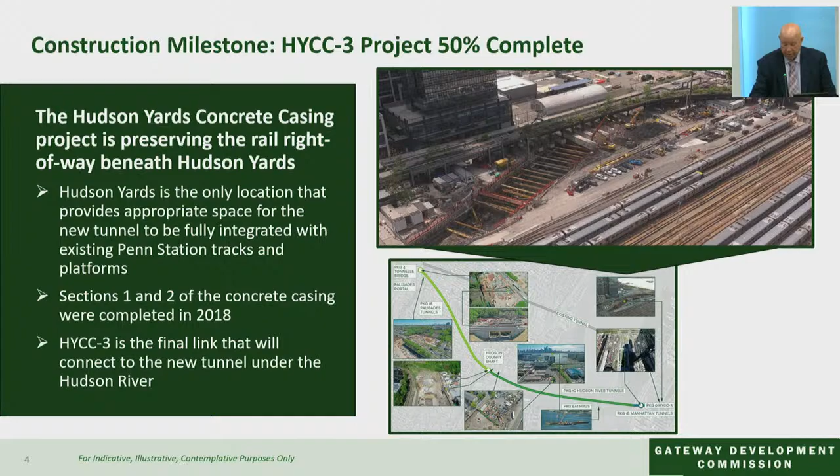The Hudson Yards concrete casing is a complex and challenging project. The biggest challenge is that complicated operations must take place within a confined staging area. The construction site is tightly bordered by an active train storage yard and maintenance facility to the north, the High Line to the south, and two busy Manhattan thoroughfares to the west and east of the parcel.

To account for these factors, the team is using the cut-and-cover tunneling method, which involves digging a trench, building the tunnel, and refilling the hole over the new tunnel segment. To prepare for excavation, the team had to drive more than 300 secant piles in the area where the trench is being excavated. Excavation and dewatering is now in progress, and the team has removed more than 40,000 tons of soil and more than 3 million gallons of water.

As they go down, they will install struts to basically construct the walls of the tunnel section. Hundreds of workers are employed building Hudson Yards Concrete Casing 3 project, and right now the project will support more than 4,800 jobs in total.

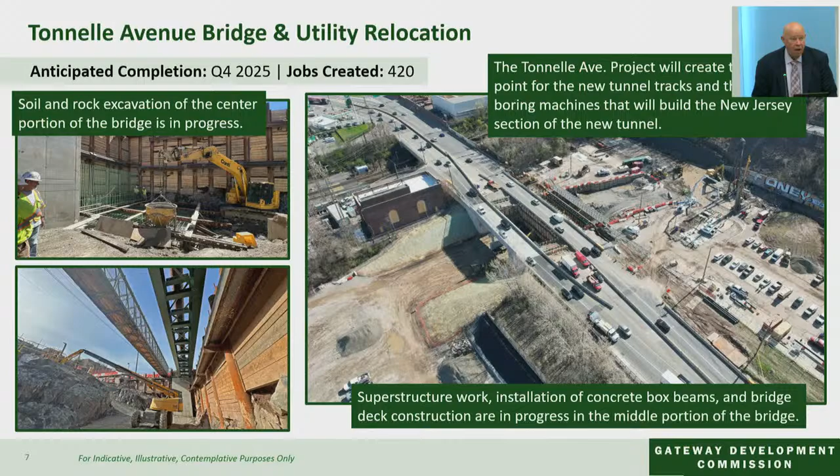We continue to make meaningful progress on our other active construction projects.

We broke ground on Hudson Yards Concrete Casing Section 3 in November of 2023, and the first phase of construction involved building large concrete blocks to support the High Line while construction takes place. At the end of 2024, excavation and dewatering of the trench with the tunnel wall began. The trench is now 50 feet deep at its deepest point. We expect the pouring of the tunnel box concrete this fall.

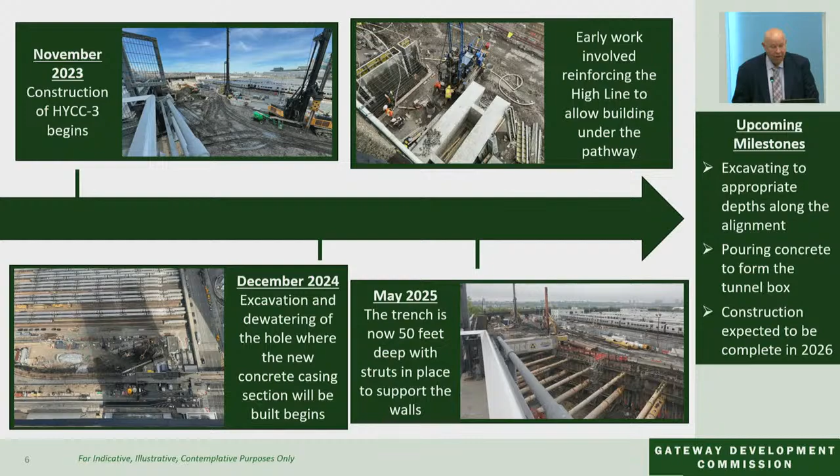We continue to make meaningful progress on our other active construction projects.

The Tonnelle Avenue project is now more than three-quarters complete and remains on track to be completed by the end of this year. The western portion of the bridge has been completed and reopened for traffic. Temporary pedestrian and utility bridges have also been installed alongside the roadway. Superstructure work, installation of concrete box beams, and bridge deck construction are in progress in the middle portion. This portion of the bridge is expected to open for traffic in the coming months.

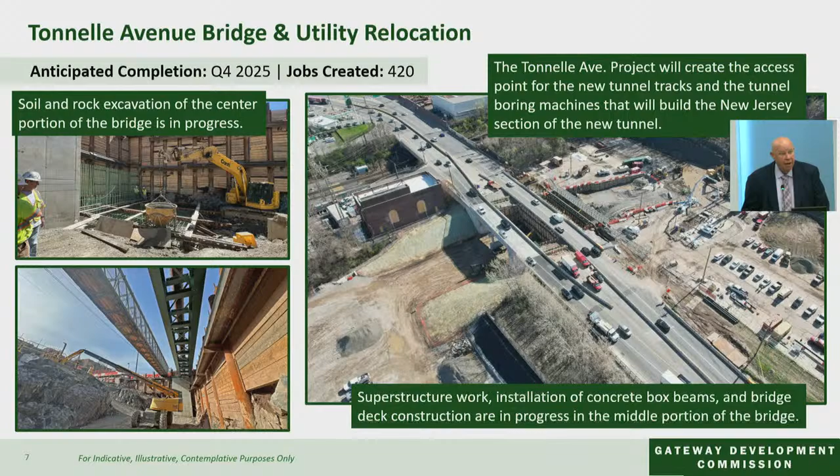The Hudson River Ground Stabilization Project is mixing concrete into the soil beneath the Hudson River in preparation for the tunnel boring that will go through that section. To shield the work area from the strong current, the team has built a temporary cofferdam in the river. You can see that here. The team has removed all obstructions from the area contained inside the cofferdam and is now moving through mixing concrete into the soil. 200 columns have been mixed to date.

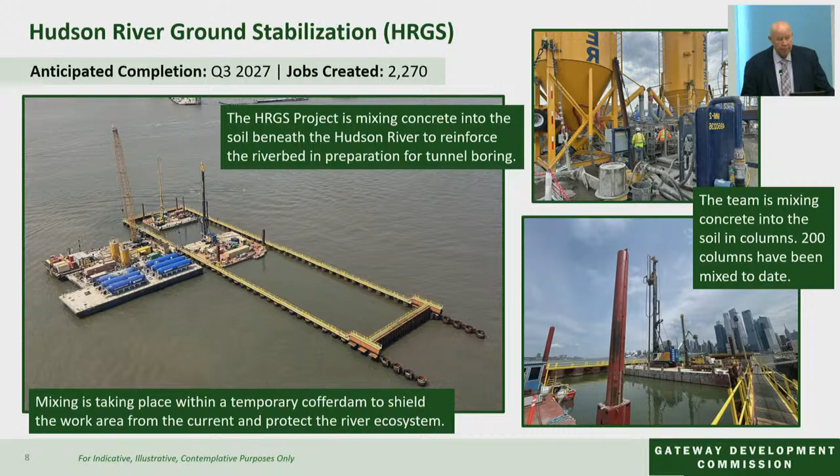The Palisades Tunnel Project is the first tunnel boring project. The TBMs that will build that section of the tunnel are in production, and they will be delivered on site and assembled in early 2026. In the meantime, preparatory work at the site where the TBMs will launch is in progress. We are also preparing to start construction of the Hudson County shaft, which will be used to remove the TBMs that build this portion of the tunnel and launch the TBMs that dig underneath the Hudson River, on the other side of the Palisades, the Hudson River side. This includes geotechnical borings and building a noise-reducing wall along the construction site.

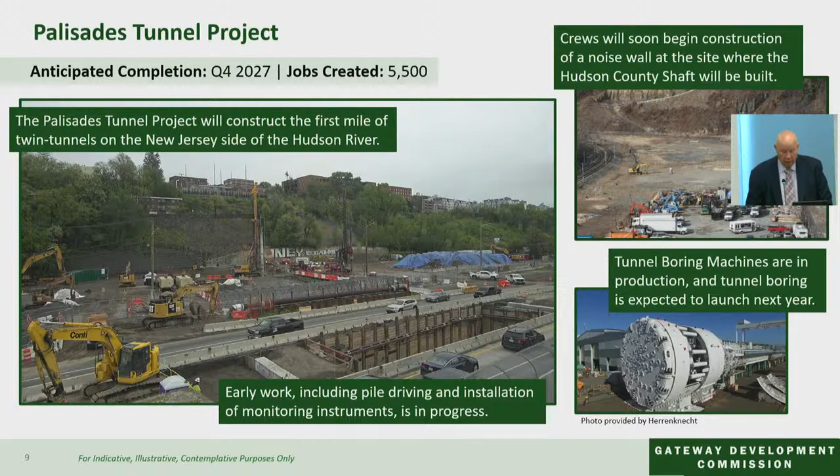Work has launched on the Manhattan Tunnel project, on the other side of the Hudson River, as this photograph shows, to build a portion of the tunnel from the Manhattan bulkhead at the river's edge to the Hudson Yards concrete casing, the Hudson Yards concrete casing Section 3 project that I just spoke of. Due to the presence of historic fill along the Manhattan western shore, as well as active sewer and utility lines, the Manhattan Tunnel project is one of the most complex packages within the Hudson Tunnel program. We awarded the contract for this project in February, and this team is currently conducting early work, including environmental inspections, sampling, and geotechnical boring. The first major construction activity will be demolition of the Quonset hut on the lot across the street from the Hudson Yards Concrete Casing 3 construction site.

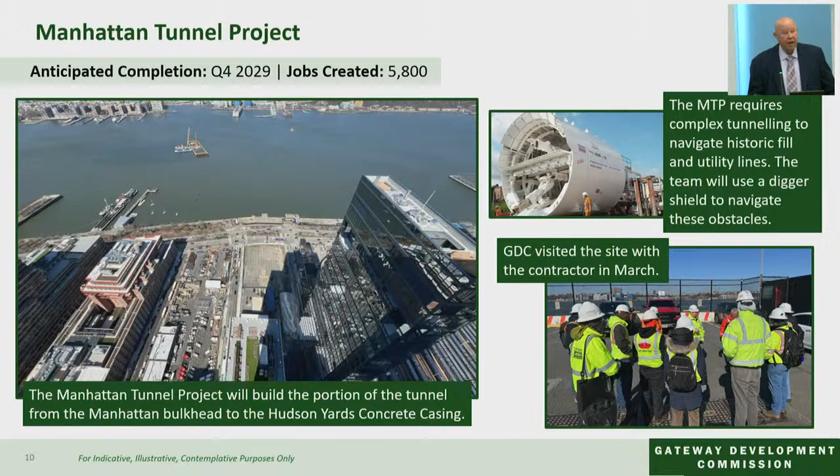I believe at this point I have a video. This is a time-lapse video.